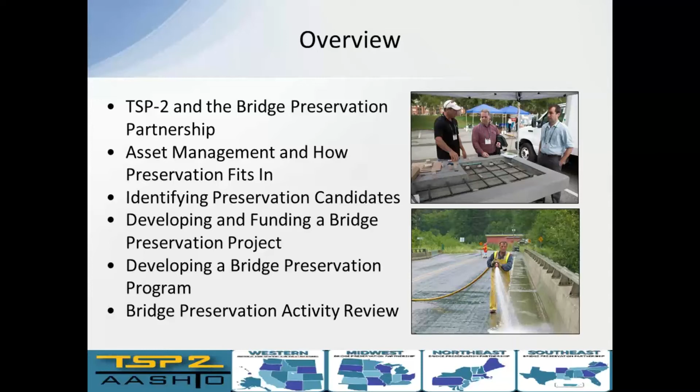Greg and I, we co-chair this working group for local agencies. The whole point of this working group was to really engage at the local level. So the TSP2 Bridge Preservation Partnership, it's composed of state owners like myself. You do have county and city engineers. You have lots of industry. You have lots of academia. FHWA participates in it. And so it's this great kind of collaboration that happens.

But we noticed that although we really had a strong support from our DOT members, we weren't really hitting the nail on the head for a lot of our local agency participants. And so this working group was formed specifically to try and engage more at the local level, encourage preservation and participation within the program. The partnership is really focused on preservation, how to extend the useful life of your bridges. I love how it is a collaboration of industry and owners.

There's not a lot of opportunities where you can show up to a meeting with, I always go to these meetings with a laundry list of my problems, specific ones, bridges that I'm not really sure what to do with, or even a statewide problem that we're trying to work on. And then I can sit down at a table with representatives from Alaska and Vermont and a whole wide range of different owners, and I can also have all the industry and all their competitors at the same table too. So you can really shop around to find that really strong solution and that collaboration approach.

Greg, who introduced himself earlier, he's a great example of this. The industry members through this partnership and the way it's set up, it can't just be a sales pitch. It's not just here, buy my product because it's better than X, Y, and Z. It has to be this collaborative effort to get you towards a good solution to your problem. And so having that set up is just something that I found to be tremendously valuable. I try really hard to maximize the partnership to reduce my effort at my own job. Yeah, so asset management plan.

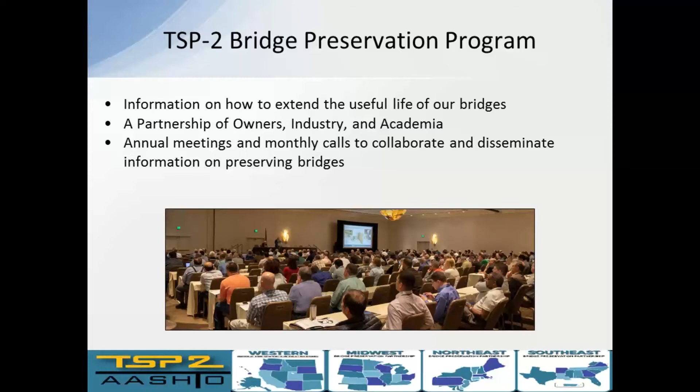I love this slide. It's exactly what I think of every time someone mentions to me their asset management plan. I have all these problems that I'm trying to narrow in on, and then they always reference back to, well, just have an asset management plan and you're good to go. So you got your forest, you got your trees, and then someone's asking, where's the forest again, right? Where do we really start on getting something that's tangible and useful to our inventories?

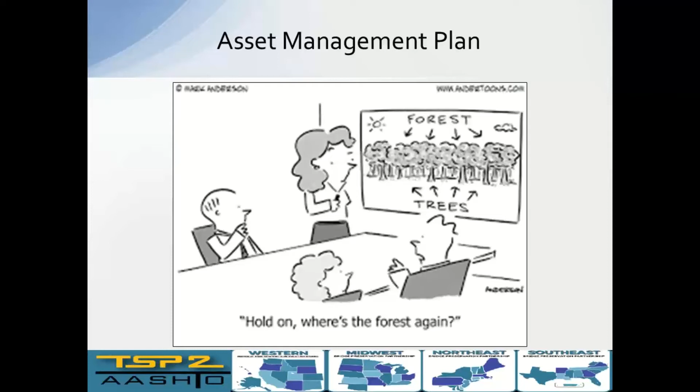This is the federal definition for an asset management plan: a strategic and systematic process of operating, maintaining and improving physical assets. You're going to focus on engineering and economic analysis, identify a structured sequence of maintenance, preservation, repair, rehabilitation, and replacement actions. The overall goal is to minimize your costs, right? So achieving a desired state of good repair. You got a bunch of good structures in your inventory at the minimum possible cost.

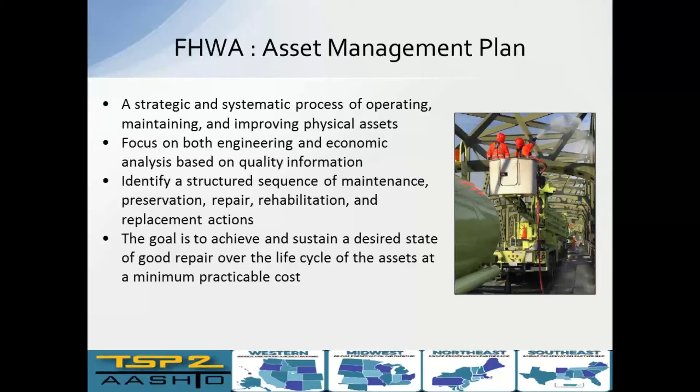This definition actually reminds me of the previous slide, where again, I read through it and it sounds pretty straightforward, but then again, where do you really start? What does it mean? I like this. This breaks it down for me a little bit better. Asset management plan. I can think of it as these three factors, right? I have replacements, which are at the bottom in red because we don't like them. Very expensive.

You get a brand new structure when you're done, but you can usually only fund a handful of replacements compared to your overall inventory, right? It's just very expensive to do. Oregon specifically has focused a lot on rehabilitation because we couldn't afford a lot of replacements. And so that's your kind of in-between tier there.

That's the significant investment in just keeping something in service. You usually get a big increase in the condition of the bridge or the asset that you're investing in, but it comes at a pretty significant cost and usually a significant traffic disruption. And then in green up there at the top, your preservation, your preventative maintenance.

Those are your actions that are kind of shown up there at the top with that bearing, right? That's just cleaning and painting. It's low cost, doesn't generally improve whatever's there. It just keeps whatever's there from getting worse. And so it's short-term, easy to do processes. Yeah, we'll kind of go into those a little bit more.

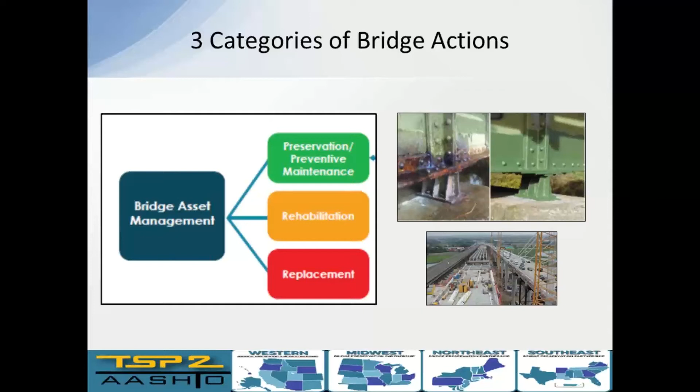So, just so people know, that particular slide came from the Federal Highway Bridge Preservation Guide, which is available online, and it could be a little overwhelming for trying to put an asset management plan together on a local level. But if you just want to take the time to peruse it, there's a lot of really good information within that guide.

Since it's published by the FHWA, it's a guide that's not only useful, but one that carries a lot of weight with it, right? If you go ahead and reference it to upper management, it's something that is a verified resource that you can kind of cite. You have your 3 legs of an asset management plan, right?

I kind of mentioned bridge replacements are in red. Those are the most expensive action. Generally on these, you're looking for your worst structure in your inventory. We see that this is a real focus, not just among states, but in particular local agencies, right? If you have a whole pile of bridges that need to be replaced and you only have funding to do a few of them, then all that funding gets dedicated towards this worst first approach.

The goal is actually to have the bridge in the worst condition, because then you get selected for replacement with those limited dollars. And so this is termed the worst first approach, right? You actually get a reward for having the worst bridge in inventory. The problem is there's too many of them, right? The cost to replace all these poor bridges is estimated at $26 billion. It exceeds the funding that is available.

Bridge replacements, although you end up with a nice shiny new bridge and get a ribbon cutting at the end, are also very disruptive, right? Replacing a bridge, even with detours, can be very disruptive to the traveling public. And it takes a long time.

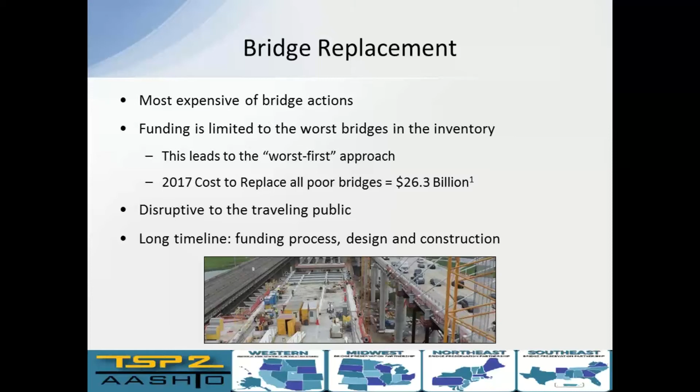Bridge rehabilitation, this is kind of our in-between activity. It's still probably a large-scale project. You're probably not going to do this with local agency forces. This is stuff that's going to be put into a large contract, hopefully with some federal funding. And a lot of times it's reserved for bridges that have one component with significant deterioration, but the rest of the structure is really worth saving.

So when you invest in a bridge rehabilitation, you're saying this bridge is really worth saving in the long run, because we're going to put this high initial upfront cost into keeping the structure in service. So the bridge is wide enough, it's serving traffic well, it's really worth keeping in your inventory. You'll do that large investment for rehabilitation. Again, these can end up impacting traffic quite a bit.

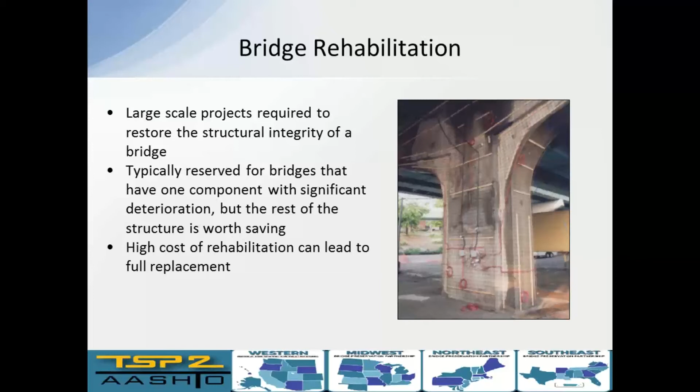Bridge preservation, what do we mean by that? These are basically just actions or strategies that prevent and delay deterioration. You're definitely not getting a new bridge. You're not getting a bridge that's been reworked to that rehabilitation level. The goal here is you keep your bridges that are in good or reasonably fair condition from getting worse.

It's not very exciting. It can at times be kind of a hard sell to upper management, because you don't see that big shift in condition ratings. Everyone wants to see that big shift with that large investment. But again, the funding's just not available.

So bridge preservation activities are ones that are very inexpensive, short-term traffic control, and they can significantly delay your good bridges from going into that poor group of bridges that need to be replaced. And we'll definitely get into much more of what that actually means.

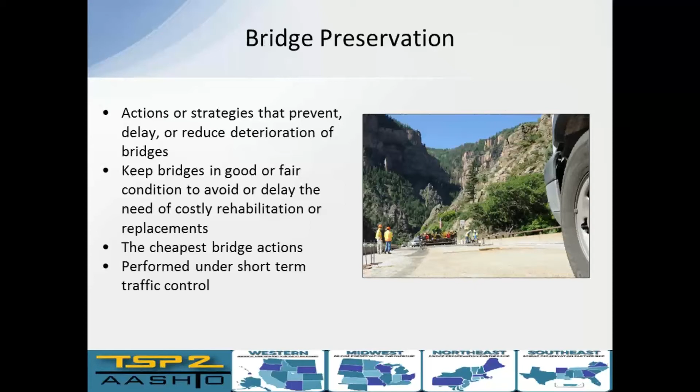Coming up with hammering home the point of what's the difference between rehabilitation and preservation, I love to look at bridge decks. One, they're really the only part of the bridge the public notices, right? If you get potholes or banging joints, you get phone calls with complaints about those. You have something going on in the substructure or the columns, unless it's something very drastic, the public just doesn't really see it. They don't really focus on it. So not only is it the one that the public sees, but it's also the one that's exposed to the most wear and tear. The roof of the bridge, so it's exposed to all of the de-icing chemicals, the rain and the snow, and traffic.

In Oregon, we allow studded tires, so we get a lot of wear and tear on our decks just from that. Highest value item. Also, if you want to do any work to the bridge deck, you have to take some traffic control into consideration, right? You have to take away a lane in order to fix it. So I call it the highest value component of the whole bridge. It's the piece that matters the most. And so we'll go through an example of rehabilitation versus preservation, specifically on the bridge deck.

I want to add to that photo real quick, because I was on this project. Can you back up one slide real quick, Travis? Yep.

It was supposed to be just a minor weekend patching project. And so they got out there with a chain to sound the areas of the deck to see what was becoming delaminated. And it was incredibly extensive, as you can see, a lot worse than they thought it was going to be. And the buses to take kids to school had to go over that bridge first thing Monday morning. So this was a perfect example of what happens when you really don't pay attention. It ended up being a much bigger project and much more costly. This was supposed to be a preservation project. It ended up being really a rehabilitation project because of the cost. The preservation was simply too late.

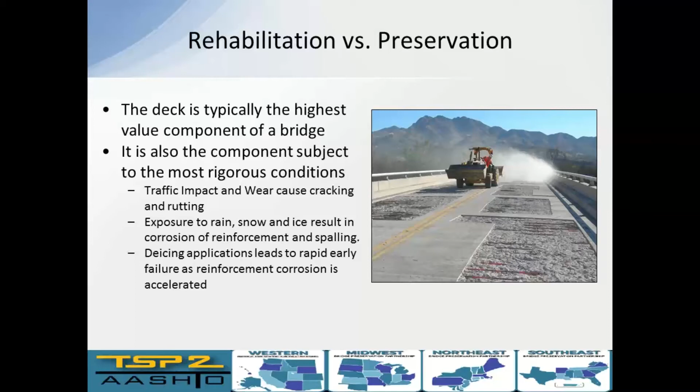Rehabilitation, what does it mean when we're talking about that? So this is an example. Once you get into rehabilitation for a bridge deck, you're removing concrete. You're getting in there, you're grinding away section. You're going to do a large patching or casting back, maybe a whole new cementitious overlay. It's a significant disruption and a lot of work.

When I look at costs for our work in Oregon, the thing that's most frustrating about these rehabilitation projects is that when you look at the bid items that are actually work being put into the bridge, it's a small percentage of the whole project. Most of the cost goes into staging. We'll spend 50 to 60% of the entire project cost just to get access to the deck to do the work. That's because, at least in Oregon, we're usually looking at a 7-day cure on our concrete overlays. So with prep and everything else, you're closing that bridge down for weeks, if not longer. So how you accommodate the traffic while you do that becomes a very big cost of the overall project.

The other thing is until you can get the funding in place to do that work, it's a huge drain on your maintenance resources, right? These are the decks where you're getting those big spalls coming off, resembling potholes, and you're getting rebar into car tires and tort claims. It's a continual patching effort just to keep the deck in service until that rehabilitation can come through. So it's that getting too far behind, like Greg mentioned. If you have that deck where you thought you could just continue on with it and it starts blowing apart on you and you end up with that much patching, it really forces your hand into doing some kind of action.

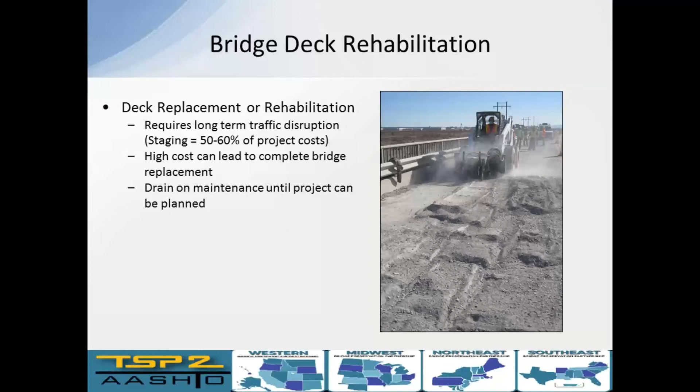The previous slide, we saw the grinder out there grinding off concrete. They're going to come back and pour new concrete. That's a rehabilitation. This is what preservation looks like. So this is an idea of a routine maintenance that you can do that would extend the life of a deck.

This is a bridge deck that's in good shape, and here they're flooding it with a deck sealer. So the idea is that they mix it. They've got squeegees out here. They're squeegeeing it into the cracks. It's going to fill those up. It's going to keep the water and the salts from getting down to the rebar and causing the deck to blow apart. You can see it's very short-term traffic control. They just have a couple cones sitting out there.

The hardest part I have with these projects and selling it to our maintenance crews is that no one's calling and complaining about this deck right now, right? The deck on the previous slide, they're getting calls and complaints saying, you need to get out here, you need to patch it, you need to fix this joint, you need to keep it so that I can drive over it safely and conveniently. This deck's not getting those same kind of public interest. No one's complaining about it yet.

And that's a key point because you have to really kind of think about, well, I can go and do this seal in a day with short-term traffic closure. And in Oregon, these are less than $2 a square foot. I can extend that bridge deck for another 5-10 years of service without having to get to those patching. But it's not an immediate problem in front of me. And so it's trying to think about how to change our thinking, to get ahead of that curve, preserve it so that it doesn't get so bad. You have to kind of do this work.

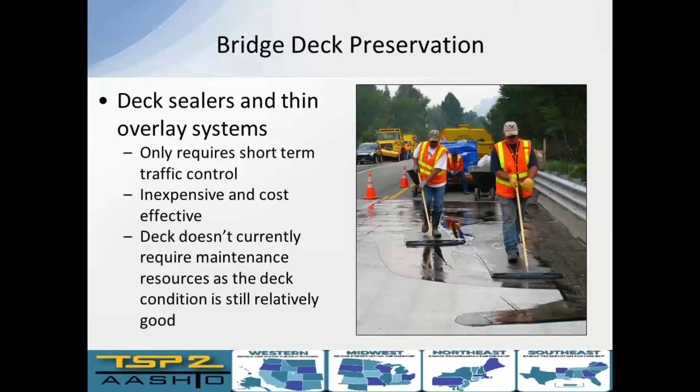And then it also helps highlight that it takes some time to see the benefit of the preservation. So part of that's educating the policymakers to say, look, this is a good idea and this is why. And sometimes you just have to wait to see how those preserved bridges perform so much better than the ones that you didn't preserve. The benefit of bridge preservation, like I just alluded to, it's easy to understand, but it's difficult to quantify. You preserve something and it doesn't actually change its current condition. It keeps it from getting worse faster.

So this becomes challenging when a lot of policymakers want to see that immediate bang for their buck, right? Even if it's a much smaller bang for the buck, they see that number increase, right? You go from a bridge that's in very poor condition to a new bridge that's in great condition, right? That gets people excited, even if it's a very little return on your investment. You're putting all your money into just that one.

And the effectiveness of preservation can really vary on what you're preserving and where it's at. So the climate makes a difference. Stuff in more extreme climates certainly benefits more from being preserved. If you're in a very benign climate, it's still a good idea to preserve those structures, but the cycle may be different, maybe further out. The structure type, current condition: if a bridge is already in relatively poor condition, it might be hard to get good, effective preservation treatments. I like to go to the extreme examples of this. An extreme example where 100% of agency funds is spent on preservation projects only, right?

So not a dime on replacement. At the end of all those fundings, there would be zero net improvement to bridge condition inventory. This is that struggle of trying to sell the benefit of preservation. It's easy to conceptualize, but it's really hard to sell at times.

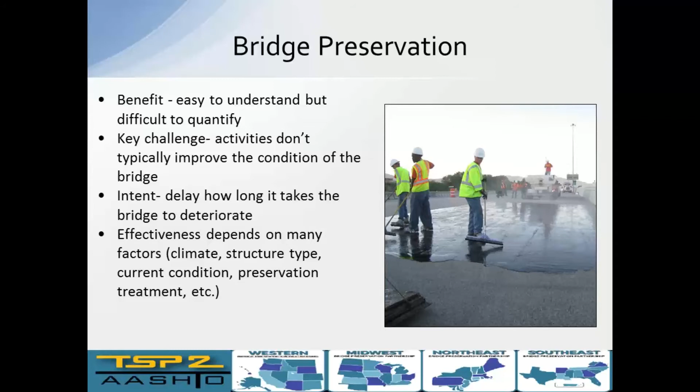One of the ways I like to try and communicate preservation versus rehabilitation is to use a car analogy. The life cycle and the maintenance requirements for cars aren't drastically different than that of bridges. So when I'm talking about preservation on bridges, I'm talking about washing bridges, maintaining joints, sealing, and we'll go through a whole lot of activities of different things you can do.

On a car, that's kind of like getting your oil changed, washing the car, rotating the tires, getting the transmission serviced. Kind of that idea that, well, I really should preserve my car, right? I should maintain it so that I don't end up having to do those engine rebuilds, the body work, tire replacement early, and transmission replacements.

Changing the oil in your car doesn't improve that immediate condition of your car, but we can all understand, even though most of us aren't mechanics, and I certainly am not one, that if I don't ever change the oil in my car, I'm going to get to that engine rebuild much faster. That's the same idea with your bridge deck. If you seal your bridge deck on a regular cycle, you'll avoid that deck rehabilitation.

It's interesting that it's a very easy concept to get through for car owners. Most of us don't change our oil on that really steady cycle, but we know that if we don't do it, there's a consequence on the back end. And so I use this car analogy a lot to kind of look at what happens if you don't take care of your bridges in a timely manner.

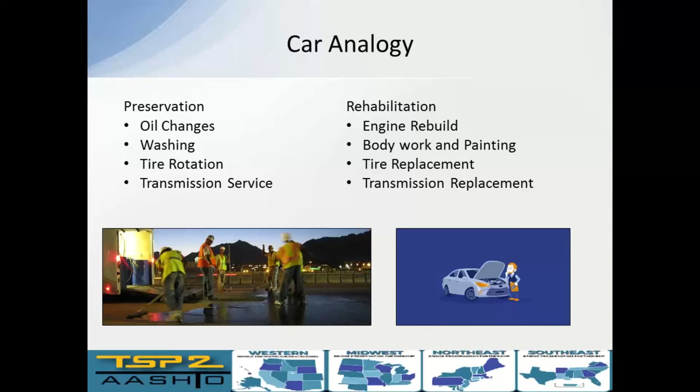We keep saying preservation, preservation, preservation. What is preservation? So these are just some common examples of things that we're talking about. These are your deck treatments, your sealers, and your thin overlays. Keep the water out of your deck. Even just washing the bridge to remove debris can really extend the life, especially around the beam ends and bearings. Cleaning out your joints, making sure that they're still watertight.

Some painting of steel structures. When you get into a full overcoat painting, that's probably more of a rehabilitation action because it's a much larger project, but even spot painting in isolated areas is definitely a good preservation maintenance level activity. Patching the concrete to keep the deck and other members serviceable, and then using waterproofing membranes when you pave on asphalt. Does the city of Lincoln, do you guys have asphalt on your bridge decks?

Travis, this is Zach Becker. I'm our bridge program manager for the city of Lincoln. We currently do not have any asphalt overlay. We're going to be applying our first two probably next year and the year after.

So it's very new to us. Oh, interesting. Okay. So in Oregon, we have kind of a half and half-ish mix. I'm actually not a huge fan of having asphalt over the top of our bridges, just because it seems like it needs to be replaced much more frequently than some of our other treatment options. When we do have asphalt, which we have quite a bit, we like to include some sort of a membrane to try and help keep the water off of the concrete deck. Something definitely to look at when you're going into adding those overlays.

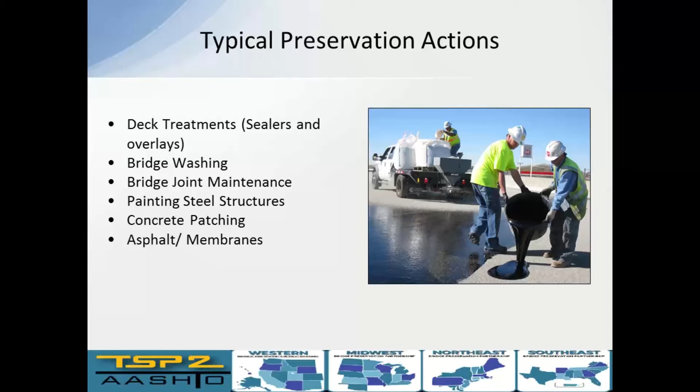Does the city of Lincoln have maintenance crews to do any maintenance activities? We are definitely more of a reactive maintenance than a proactive at this point. Our asset management program, we've been working with our street maintenance group, but we're really just trying to get better at that. And it's sort of still a new thing to us, but we do have maintenance crews.

One thing I was going to add, and Travis, I don't know if we have any reference to this, but the Federal Highway folks, and we were involved with this process, created some pocket guides that are now phone apps for some of these preservation actions, and they're available in kind of a checklist format. So if you have maintenance crews and you want to perform some bridge washing or patching or deck sealing or something like that, your maintenance crews can pull the app up on their phone and go through the checklist, make sure they have all the right tools and equipment and the surface preparation, and it's really very detailed, point to point, step by step method.

So anybody in any kind of maintenance crew that performs activities at all can easily follow and perform these actions with this phone app. And we definitely do have references to those at the end of the presentation, Greg, and then we'll make the presentation available as well, so you guys can have those resources for sure.

Once you look at why do preservation, if we get past that first hurdle, we want to maintain the bridges. Now it's starting to look at what bridges should we be looking at maintaining. So there's a few different categories. There's going to be these high value bridges. This is the historic McCullough Bridge in Coos Bay, Oregon. It's a beautiful bridge. It's 5,400 feet in length. It was constructed in 1936.

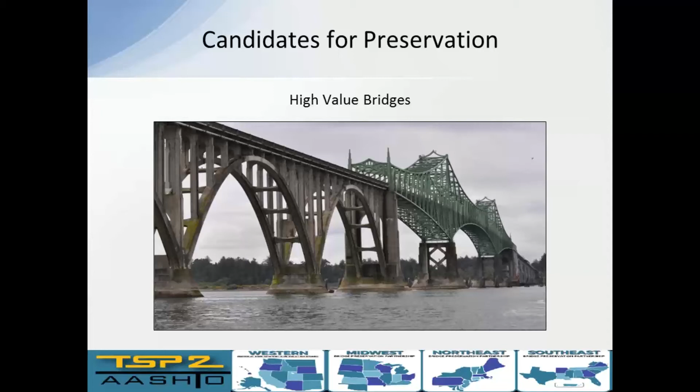These aren't the ones, though, that we're really trying to weed out, right? These are the ones that kind of stand out to everybody. General public gets the message. These are the ones that are easy to preserve. The ones that we really want to focus on, from my perspective of just maintaining the overall inventory, are the ones that are in relatively good condition. And so it doesn't have to be that beautiful, massive, historic bridge that makes it worth preserving. It just needs to be a bridge that's serving its purpose and hasn't fallen into a state of disrepair yet.

Once your bridge really starts deteriorating on you, it kind of doesn't matter a lot what's the method or the mechanism for deterioration. It's going to progress rapidly, right? It starts to kind of grow exponentially as your bridge condition continues to drop and you get towards that bridge replacement. Once you have a bridge that's in very poor and severe condition, it really is not going to help you a lot to go and throw a sealer on it or to wash it, because at that point your bridge is probably lost and it really needs either a massive rehabilitation or more likely a replacement. So it's really trying to focus in on those better bridges and keep them in service for longer. You already have a lot of data at your fingertips for this.

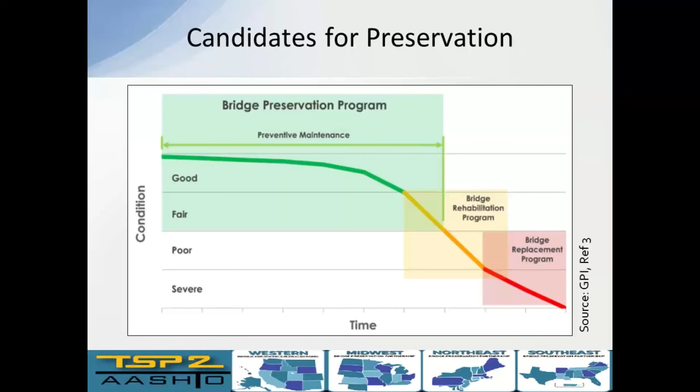The National Bridge Inspection data will help get along that path for looking for those good bridges. I would caution against focusing just on the NBI data, which was what was shown in this previous chart, right? Good, fair, poor, those are NBI deck, super, sub ratings. Get down into the element level data. That's where you can really go into the bridge components and look at your cracking in your deck elements, your leaking joint condition states, and start to really train in on very specific projects that can be addressing

those defects. In Oregon, we're having defects that are assigned to all of our element level data. And so the inspectors will put on their spall, that cracking, and I'll just go and search the database for those defects, or hopefully the maintenance recommendations, and start pulling those out as we prioritize our work for the year.

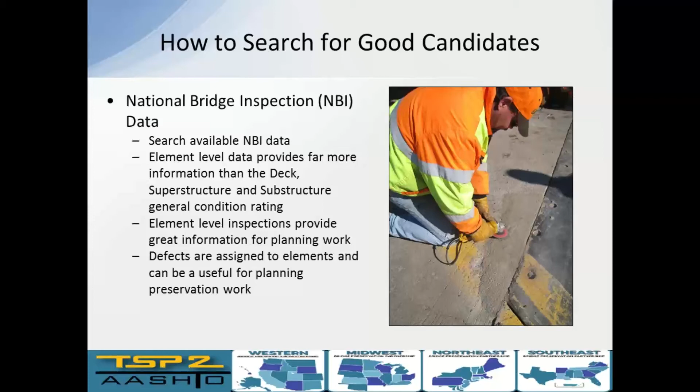Developing a bridge preservation project. One of the first things to look at is, is this stuff that can be completed in-house with those maintenance forces that you have, or do you need to put it into a contract? There are a lot of products and applications that can be done without a great level of skill set or a lot of equipment costs, right? There's a lot of stuff here where it's a 5-gallon bucket or a big trash can and a mixer and squeegees, right? Stuff that you can pick up at a local Home Depot.

There's other stuff that's going to need higher, more technical expertise, and that would be more suited for contract. Regardless, if you're going to contract work, I would strongly suggest looking for the ability to bundle it, right? Preservation projects are usually of that smaller scale. Using decks as the example, to go seal a deck in Oregon, a typical deck, 5,000 square feet, that's probably in the ballpark of $10,000 to complete with our crew forces. Not a huge cost for that one deck.

If I put that out into a contract, I would probably get some bids on it, but it wouldn't be for $10,000. It would be for a much higher rate, because it'd have to make it worth that contractor's time to actually go through the process of doing that. You also pay a little more overhead in contracting work, because you have to go through all the plans and specifications, instead of just handing one of the maintenance crews that pocket guide or some other reference material to just go and do the work. So do think about that if you decide to contract it, to bundle it.

I would encourage, especially since you guys are talking about that beginning phase of maintenance of this bridge work, to do some work in-house. I watched a great presentation at the Pacific Northwest Bridge Maintenance Conference, where there was a local agency. He had no crew members at all. He really wanted to install an epoxy overlay on one of their bridge decks. He was adamant that it was a good bridge deck to save. He had concerns with the amount of salts that were being applied to it and wanted to extend it.

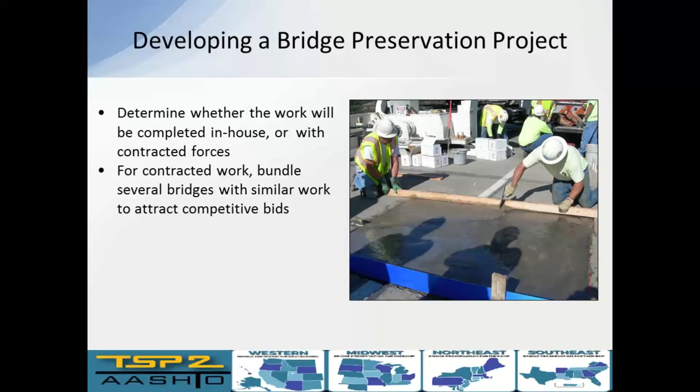So we always invite the rep out and just ask if you're going to be around and you're available, please come and give us a demonstration. And then we'll actually invite other crews over to come and watch it as well. Even though they may not be installing it then, it may be something for them to look at in the future. Definitely some great contacts through the TSP2 partnership for doing that.

Funding bridge preservation. It can convince you that it's worthwhile to do and kind of help show where the projects are, but if the funding's not available, then we don't get very far. The federal funding has actually stepped up behind this. With the Moving Ahead for Progress in the 21st Century Act, MAP-21, and the Fixing America's Surface Transportation FAST Act, the government recognized the benefits of bridge preservation and made it all eligible for federal funding. There is federal funding that could be available for this.

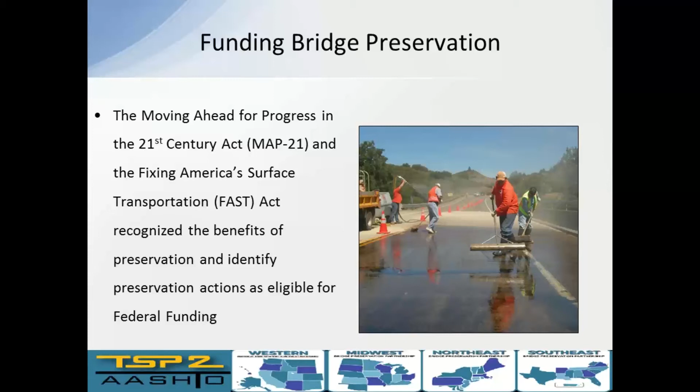So some of the actions that are specifically called out are things like bridge washing, cleaning drains, joint cleaning, sealing concrete. These are cyclical activities, so these are ones that you aren't necessarily reactionary, but it would be something you try and put onto a schedule. Every year I'm going to clean this bridge deck, and every 5 years I'm going to seal the concrete, some kind of a cycle. I will admit, even in Oregon, we totally bought into the preservation and the cyclical activities and the benefit they could bring.

We are still very reactionary in Oregon as well. Right, so it's something to strive for, something to consider trying to set up, but I totally understand the constraints that Lincoln City is under and us as well, where it's just hard to get out of that reactionary mode. Getting a cyclical maintenance is definitely one way to do it. The list goes on, it gets much longer. So these are more condition based.

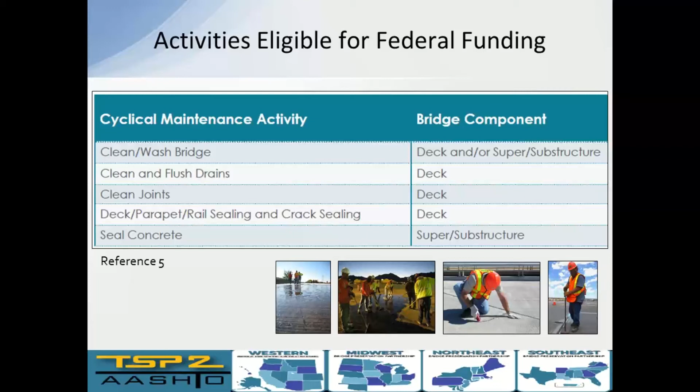So these are where you actually have a defect and you're correcting that defect through some level of preservation. So you're repairing the drain that's broken, you're overlaying a deck with asphalt. If you include the waterproofing membrane, then it counts as a preservation activity. Thin polymer epoxy overlays, those are something that Oregon has really embraced and we've really got a lot of mileage out of. I'll show an example of what those are, but it's basically just about 3/8 of an inch thick. It has aggregate mixed in with epoxy on the bridge deck, and it actually gives you a whole new wearing surface and prevents water and salt from getting into it.

Out of curiosity, are you guys aware of any of the thin polymer epoxy overlays on bridge decks in the Lincoln inventory? We have done some silica fume stuff in the past, no thin overlays to date. The state has done some in our area, so we are aware of them, but still we haven't gotten to it yet. I'm working on it right now.

The silica fume overlays, we definitely have a lot of those in Oregon. Those are what we would call a rigid overlay. They definitely have a purpose. I usually put them more as rehabilitation than just preservation, although I guess they can be in both categories. The one thing I like about the thin polymer epoxy overlays is that we're installing those at around $4 a square foot, where those silica fume overlays are much, much more. And we're seeing some really good results out of them. So a good low cost, low tech process.

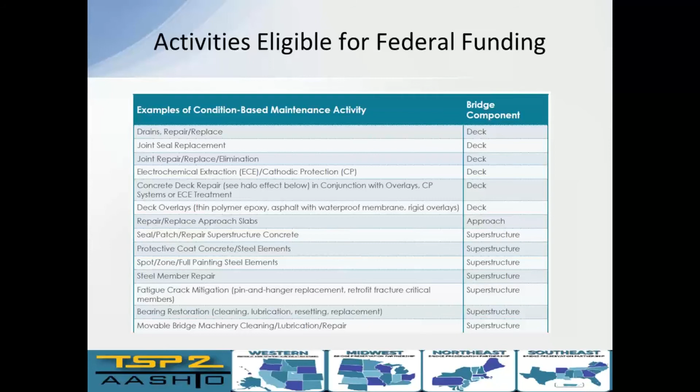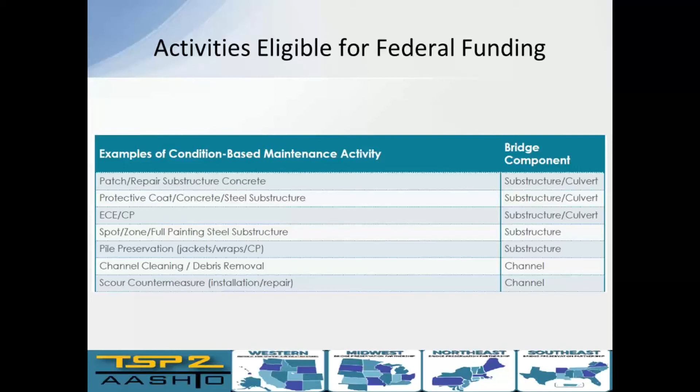And again, I'll go over a bunch of these different actions later in the presentation. I just wanted to give an idea of how big the list is, and it continues on, right? There's more and more that all qualify as preservation. These qualify for federal funding. When we were developing this presentation, we said, well, this all qualifies, this is what's going on. And then we said, okay, let's go ahead and grab a handful of our local agencies that have been active with us, and we'll use them as examples for just how great that funding is for doing this preservation work.

And a lot of what we're seeing is that the big federal and state funds that the locals compete for really get locked into that worst first approach for an awful lot of what's happening. We're trying to work with agencies that have already got their hands on that fund to use as examples, and also trying to look into ways that our group, in cooperation with that expert task group, can start to look at changing the system a little bit to make those funds more readily available and easier to use

for preservation activities. I will say that the bulk of the preservation activities, the real success stories that we have seen, are the locals generating their own revenue to do these lower cost activities. And so we hope to include a lot more on this in the future. Definitely ways to get your hands on state funds for preservation and hopefully federal funds. But right now, the best examples we have are those that have bought into the process at the local level and generated their own revenue to do these low cost activities.

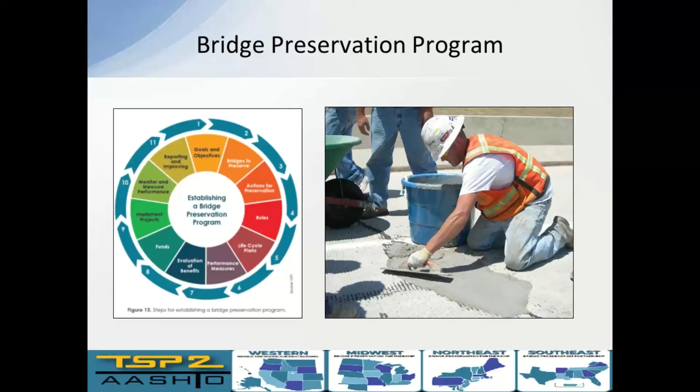Bridge preservation program, we've got a wheel here that covers 11 different steps. This is from the FHWA bridge preservation guide. We've already discussed quite a few of these steps, right? We've gone through identifying preservation actions. We've looked at selecting projects, evaluation of benefits, and looking at the funds. It's a lot of steps here. We won't go through all of them during this overview, but wanted to at least show that there are some nice graphical breakdowns to show how this can be done.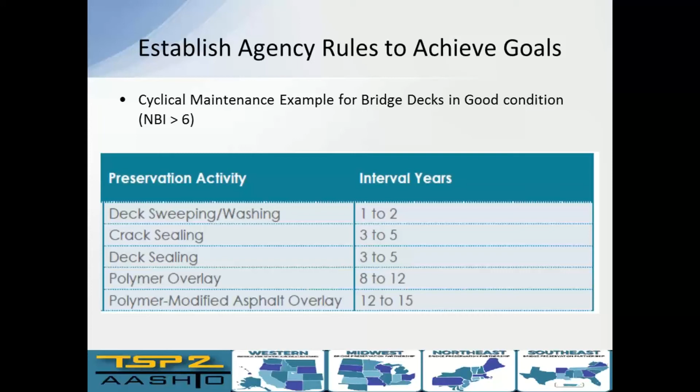So measuring the benefits, there's been tons of work taking place on how you show the benefit of preservation.

We've already come out and said straight up, it is difficult. It's hard to show that change in condition because a lot of preservation actions don't jump the condition significantly. A lot of times it just delays the rate of deterioration. However, some stuff does. So say the thin polymer overlays, those are actually an overlay that goes over the bridge deck, still a low cost preservation treatment.

You can show that it actually increases the bridge's condition and then show on a chart how it actually increases the service life. So this is all based on predictive deterioration models. There is a lot of research that's out there already on this, and actually a lot taking place now to truly show in a deterioration model the benefits of preservation for different activities. But again, you'll see here that the action was taken while the structure was still in a relatively good condition. So you get that jump back up and delay that drop off of the curve.

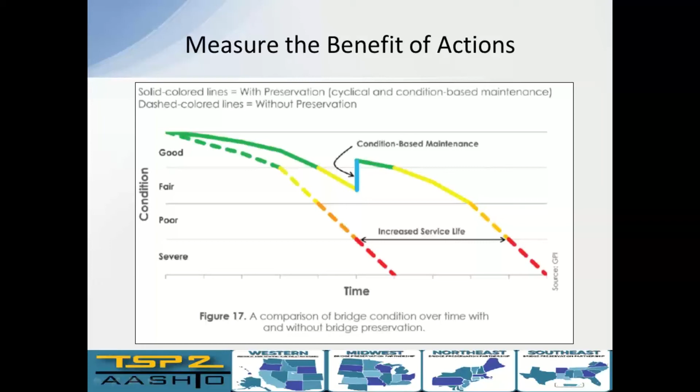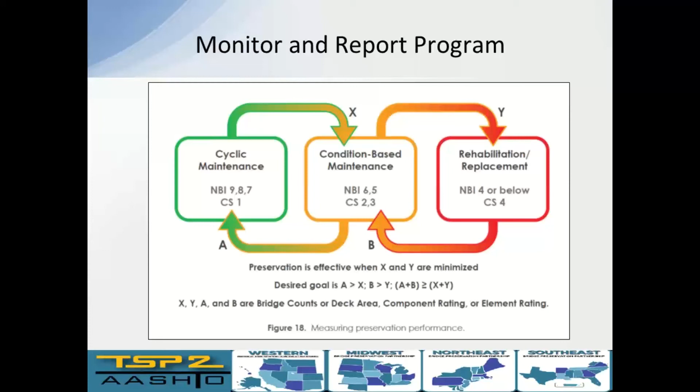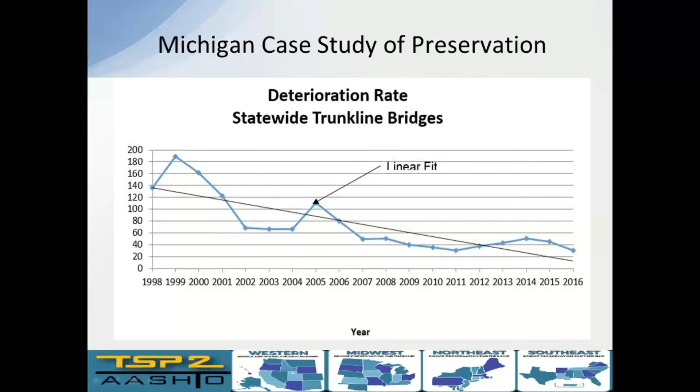So now we'd like to run through a whole slew of different preservation treatments. This is just meant to give you an idea of the different activities that are available, and an idea of just how hard or easy they are to accomplish. We'll also go to the additional resources that show a whole lot of different information on how to go way in depth on this. So this is just a brief overview to kind of give an idea.

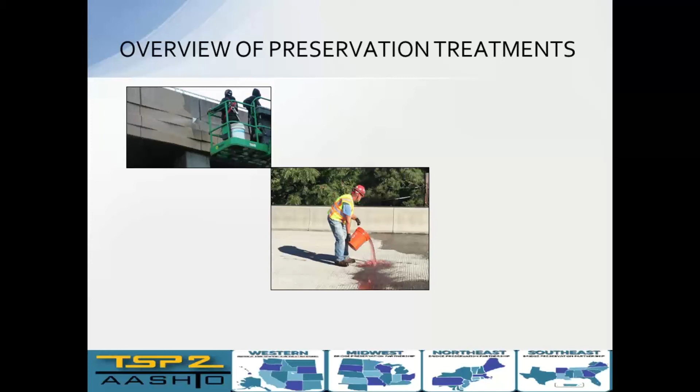So we'll kind of start with the easiest stuff, right? Cleaning and washing. That's really pretty self-explanatory, but can provide some tremendous benefit to the bridge at a very low cost. Washington State has done a lot of research on this. In particular, they did some work that really helped from an environmental standpoint, especially when you're working below the deck and you're washing off the bridge. Well, that debris will fall down into the water below.

There were some pretty tight environmental regulations, in particular in Washington and Oregon too. We piggybacked off their research. They said, hey, look, you've got to contain all this water. That's a huge effort, right? That takes it from just using the fire hose and cleaning it off to full containment, having baker tanks and filtration, and just this huge deal.

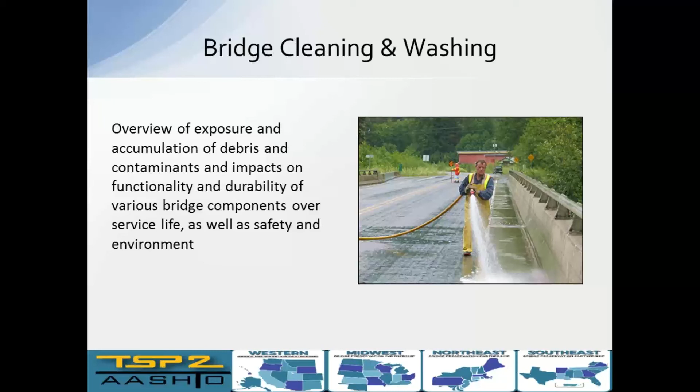They went ahead and showed that if you measure upstream and you measure downstream and you clean at a reasonable cycle and you do it at the right time of the year, you can't measure the amount of contaminants that were put into the water. And that was something that was presented through this TSP2 partnership that Oregon piggybacked on pretty quick to actually get that benefit from. Some of the things that you need to think about when you're getting ready to do the cleaning is the accumulation of contaminants.

I just mentioned if you're on a good frequency, you're probably not going to be able to actually test that level of contaminants that go into the water. If you only clean once every 50 years, well, that may not hold true either. And so just some of the things to think about as you go and start to set up a cleaning and washing program. But I would highly recommend referencing some of that research that was done out of Washington State.

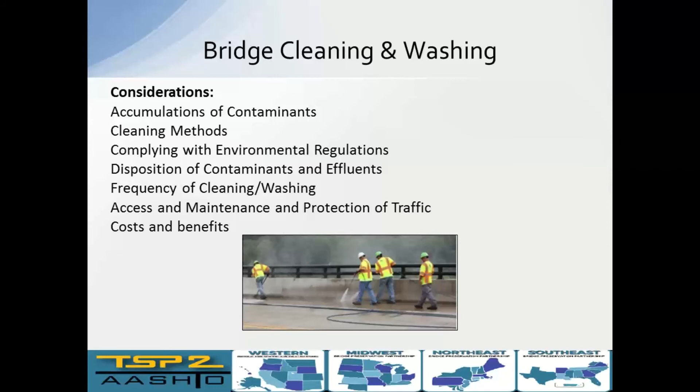Certainly methods of access is going to be something to look at if you're on an overpass, but certainly the bridge decks, you can block off your drains and clean the bridge deck with very limited environmental exposure. Some steps to do before you clean: sweep the bridge deck, right? Get rid of as much of the debris as you can while it's dry. Same thing with around your bearings and your joints.

If you get a lot of that debris out before you start hitting it with the water, you can kind of get down into that level of this is not going to be washing off a lot of contaminants. Pressure washing expansion joints is really important to keep them clean, because the debris will kind of impact the joints and it'll lead to them failing much quicker than if they were cleaned out. It's a lot more work to replace a joint gland than it is to flush it out.

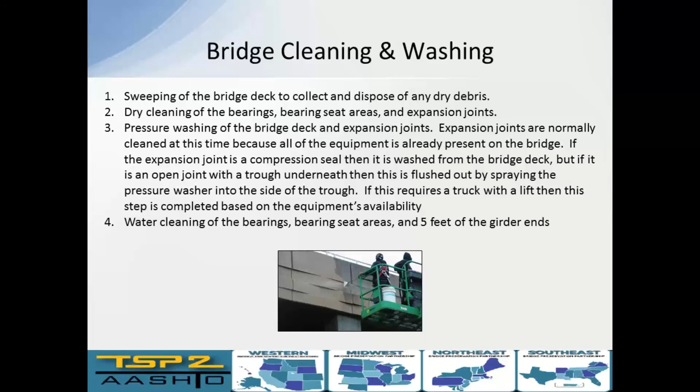Certainly the whole structure could benefit from being cleaned, but really, if you focus in on the deck and then underneath your joints where you have your bearings, your beam seats, and then the beam ends will give you your most bang for your buck. So this is a very low technical, low cost activity. It can be accomplished with any number of in-house forces. I actually heard of us working with a local fire department to clean some of our trusses where they just kind of worked on using their fire hose. Cleaning the deck's important.

Sealing. So these are penetrating sealers. Again, it's a very low cost, easy to apply activity. This one here is a penetrating sealer. It goes down with like a spray bar, as you can see in the photo here on the right. A lot of times these are a silane type of product that actually seeps into the concrete and makes it bead up water. So it doesn't necessarily fill in the cracks, but it does make concrete repel the water as it hits.

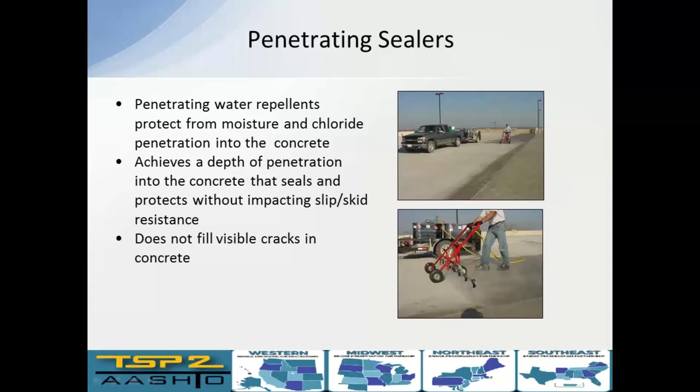And of course, if you keep the water out, you're keeping a lot of the contaminants and chemicals out as well. It doesn't impact your skid resistance or your slip resistance with tires on it. And again, very low cost, very easy to do. There's other types of sealers as well. There's flood sealers where you're flooding the deck, and in these ones, you're trying to actually get in and fill in the cracks.

A lot of times these aren't actually being absorbed so much into the concrete as they are a crack filler. Definitely useful for keeping those salts and water from getting down to the rebar level, where you really don't want it, because that's what will start causing your decks to kind of break up and start cracking away on you. Sealing, we're kind of looking at, if you use a rule of thumb, maybe a 5 to 7 year frequency. And again, you're looking at a pretty low cost investment.

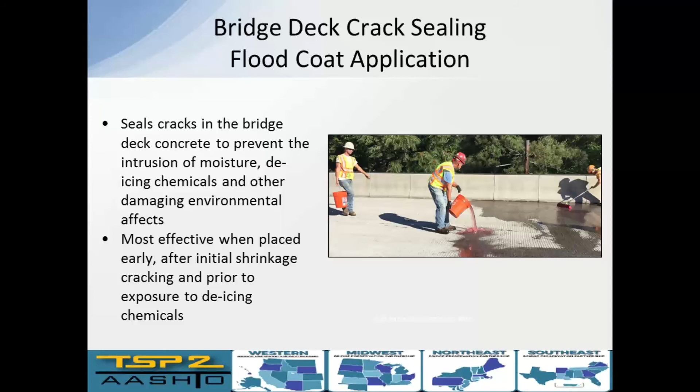Thin polymer overlay systems. This is what I mentioned. We've been using lots of these in Oregon. We install them with the in-house forces and we contract them as well. These ones actually create a barrier on the deck. So it doesn't just slow the rate of water and salts from getting down into the rebar. It actually makes that barrier. As long as the barrier is maintained, it gives you almost a complete protection.

And a benefit to these is the traveling public likes them because it looks like you have a new overlay, right? You do have a new overlay, but a new wearing surface. We've noticed that the skid resistance on these go through the roof, at least initially. They probably wear back down as they polish up a little bit towards that original concrete deck, or maybe a little bit better than it. Choosing a good aggregate for the broadcasting can definitely make a difference. I think I have some installation photos of it.

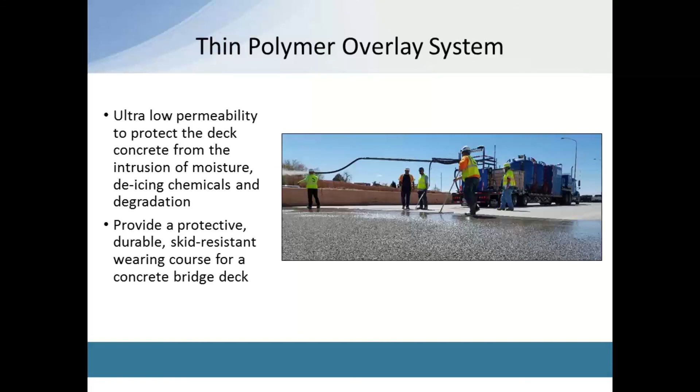So these are typically an installation where you start off, it looks similar to a deck seal that we talked about, where you have a squeegee there and you have the epoxy going down over it, but then they broadcast aggregate into that epoxy while it's still soft before it is actually tacked over and set. And that aggregate is what forms that skid resistance, that wear resistance, that lets these things last for a long time. Again, the costs on these are relatively low.

I know in Oregon, we're kind of in that $4 a square foot range for these type of overlay systems. So maybe double your cost of a deck seal, just sealing up the cracks, but with this you actually get a new wearing surface that is intended to last for quite some time.

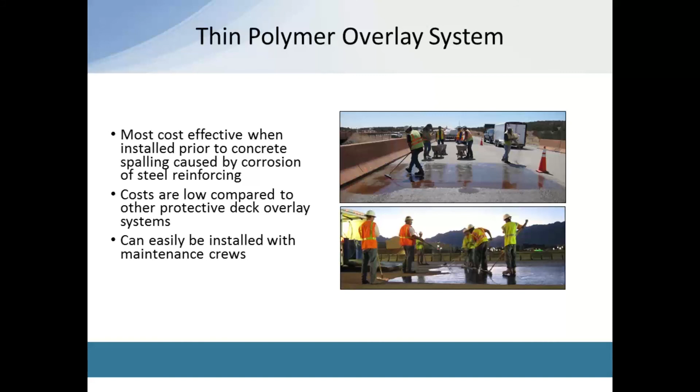This photo just shows on the left-hand side, they've installed the overlay. So you have that nice new looking wearing surface. On the right, they're still getting ready to do the overlay. This is short-term traffic control. You install, the second lift just as done on the first lift. So you do 2 different lifts to get you to that 3/8 inch of thickness.

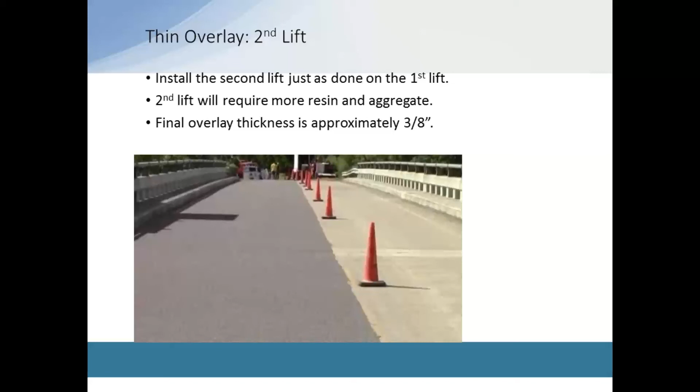This is a reference to the pocket guide that Greg had mentioned. And Greg, maybe you want to jump in and run through this slide here. A lot of content on various slides called the pocket guides. The pocket guides are published in PDF form on the TSP2 website. I don't know if we have time to show that right now, but I think there's a slide later in the presentation that shows how to access the PDF form of these pocket guides. They're free. They went through a lot of oversight and review before they were published.

They're very intensive. They're in a checklist format, which makes it really easy if you're a crew, or even if you're developing a specification and you want your inspectors to understand what's taking place. When the contractors come out, the inspectors have a checklist. Even if they're not familiar with the process, they can work through with the contractor to make sure that they're following the best practices. So these pocket guides are really an excellent tool. They're free. They're available in a phone app as well.

One thing I'll add, in my history involved with these various preservation activities as a material supplier, what typically is the cause of failure has to do with miscommunication between the development of the specification, the bid documents, the contractor not understanding best practices. And so these pocket guides really fill in all the blanks with that. And the other thing is if you have a maintenance crew, it gives them an opportunity to review the best practices. So it's really a great tool.

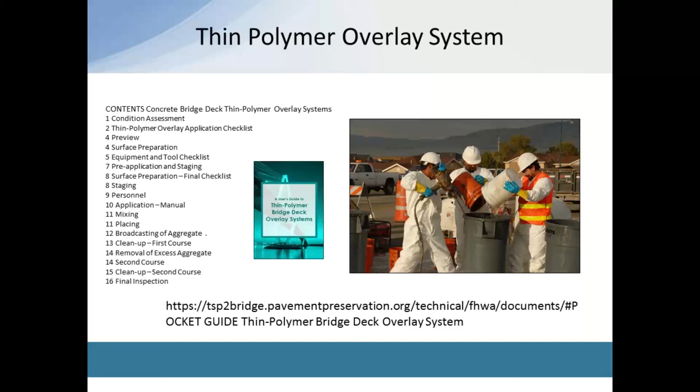Sealing asphalt, at least in Oregon, we have 3 different types of membrane systems that we use with asphalt. There's the spray applied membranes, which is a polyurea. Typically, there's a polymer membrane, which is very similar to the thin overlay that we just showed. We just install it before the asphalt. And then there's the rolled membrane solution, which is a fabric type of a membrane.

I think I'm going to just run through some ideas of what the rolled membrane installation is. So I'll back up real quick. The spray applied membranes, those are typically going to be done under contract. They do require some specialized equipment. It would be possible for crews to install these on their own. However, certainly in Oregon, we do not, and I'm not familiar with other states doing them.

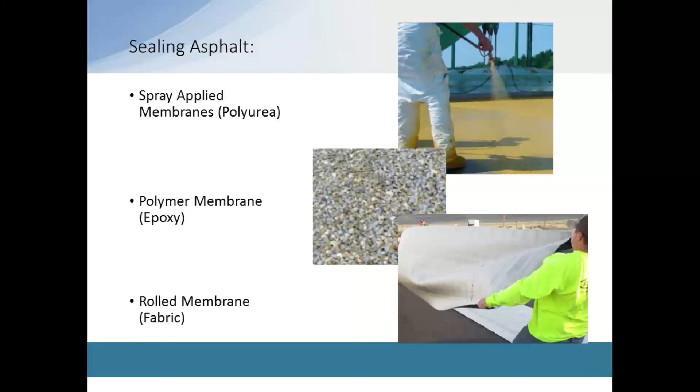I would call them maybe more of a Cadillac of the membrane systems. They do seem to perform quite well. However, they come with a pretty significant cost compared to the other 2 options. So since we're trying to encourage installation at the in-house level, I'm going to run through the rolled membrane solutions because these are the easiest ones to put down.

And so here's an example of a crew. This is one of the Oregon crews installing a rolled on membrane. Really is just like it sounds. It's a fabric that goes down. You roll it out. You can see this one has an adhesive backing on it. And so the person in green is pulling that backing off. So they're going to go ahead and adhere it down to the deck.

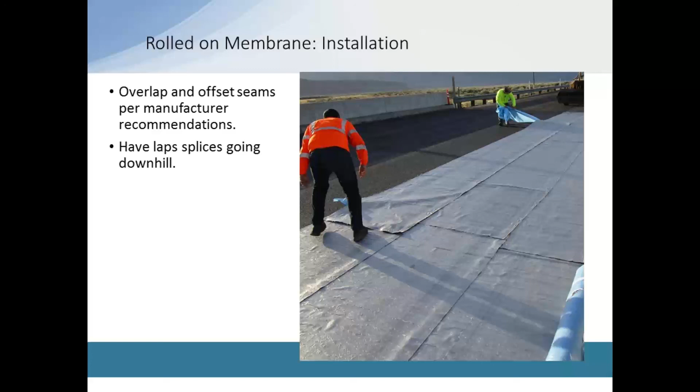They overlap their splices. It's really a straightforward thought of trying to basically put a rubberized kind of material into the asphalt so that you keep the water from getting down to the deck. And here they are, they're paving over the top of it. Low cost, we're in that $2-3 a square foot range. Of course, it varies depending on the product selected, but relatively low cost and definitely relatively low skill level to get installed.

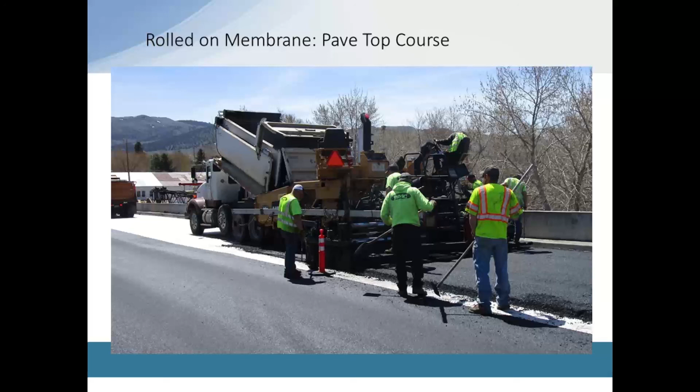Joints have a whole wide range of different kinds of repairs. A lot of times they end up with replacements. They get broken up. Joints are one of those things in the preservation community that get picked on a little bit, right? Everyone can point to joints that have failed, some prematurely. They tend to be very sensitive to being installed correctly. A lot of these joints are being glued or adhered into place. And so anytime you do something like that, you know it's not a mechanical interlock. It actually needs to be prepped correctly and done well.

The whole purpose of a bridge joint is to allow the bridge to move, right? It moves under thermal cycles as the bridge expands when it gets hot and shrinks when it gets cold. If you don't allow for that movement, then you can cause some really significant damage. I've seen where the bearings and the anchors have been dragged as the bridge bound up and pushed itself. And we started having concrete falling off the supports where those anchors were embedded, because the forces are so tremendous that they're just going to move, and whatever's in their way will get broke.

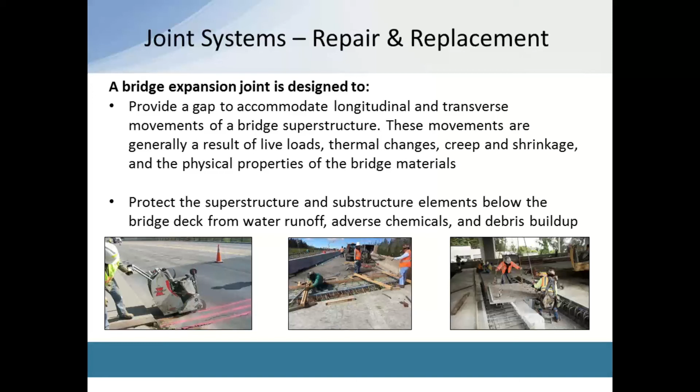Aside from being impacted and causing that damage, if your joint just leaks, then you get all the debris and the other stuff that you've been trying to seal the deck against getting down. Now it gets down through the joint and onto everything that's down below, and can cause some serious problems down the road. Fortunately, bridge joints can be pretty effectively maintained.

You can go through and clean them. The photo on the left is a crew installing a new gland into a joint with armored corners. You can see there's a finger joint on the right, where you actually have the steel fingers that kind of overlap and go into here. Those joints typically don't have glands with them, so they're considered an open type joint. But still maintaining them can help with plows and any other damage you'd get.

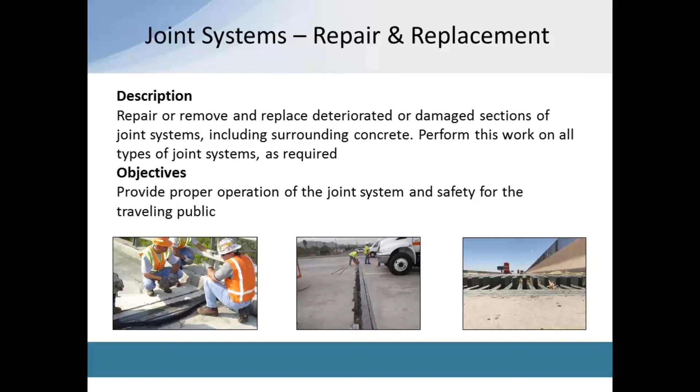And then you can see in the photo in the middle, they're saw cutting out a bunch of material and going to be putting in some new headers to improve the ride across. There are pocket guides for these. As Greg had mentioned, pocket guides for the overlays. There are also ones for cleaning or washing bridges. And then this is for the expansion joints. It's really helpful to educate and get a good installation.

Like I said, these are very sensitive to being done well. They are conducive to in-house forces. You can definitely do them with crews, but you at least need buy-in with the fact that skipping a few of the preparation steps can result in the joint failing almost immediately. So it's one you just don't want to skip on, but it's not particularly complicated to do it well.

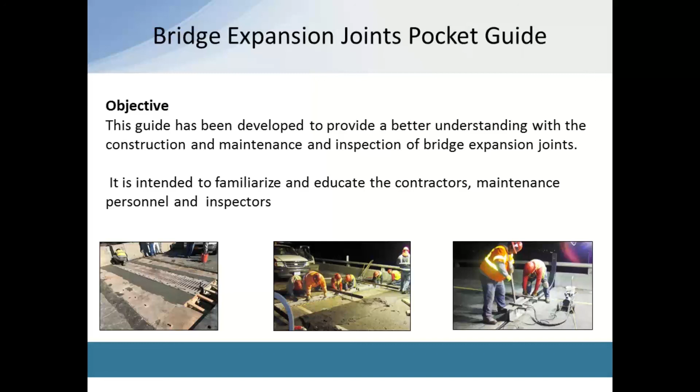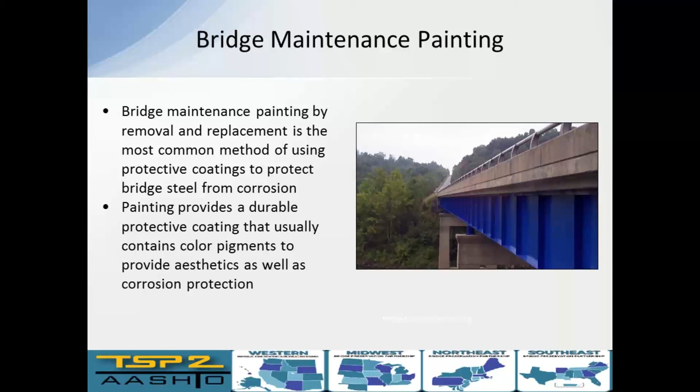Painting's another type of activity that's pretty common. This is showing an example of a full overcoat, so maybe not the best example, but where you have steel beams with some paint failing on the end, doing a good removal and cleanup and then just touch painting the end can extend the life of the whole overcoating. And here's some examples.

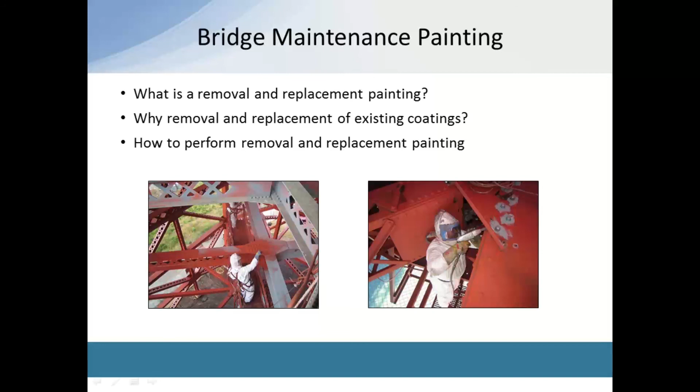You want to do maintenance painting before your overcoat gets in very poor condition, right? You've got to get to it before it's failing all over the place. So spot painting can be very effective when it's not in particularly bad condition, with good surface prep, similar to the joint work. If you don't do any prep and just slap a coat of paint over some rusting crevices, it'll rust right through the paint and won't stop.

It can definitely be done with local agency personnel, in-house forces. Good specification and training is vital on this one, because if you don't do it well, it'll fail quickly. Of course, a lot of our bridges have lead paint, so making sure that you're in compliance with environmental and OSHA measures to keep workers safe is a key part.

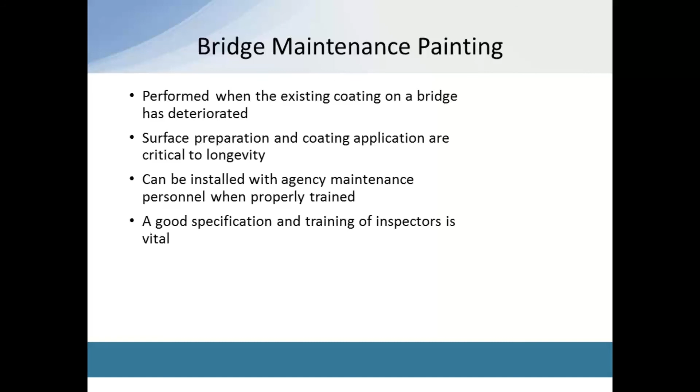But patching is done for a variety of reasons. Corrosion of the rebar is probably the #1 cause for big delaminations. You get water and salts down to the rebar level, and it starts to form rust. When the rust expands, it expands significantly, and it'll pop out the concrete. You can also have freeze-thaw cycles cause problems with concrete. Load stresses, so you have big overloads. We have problems with our new overlays and new decks having a lot of shrinkage cracking right after they're poured.

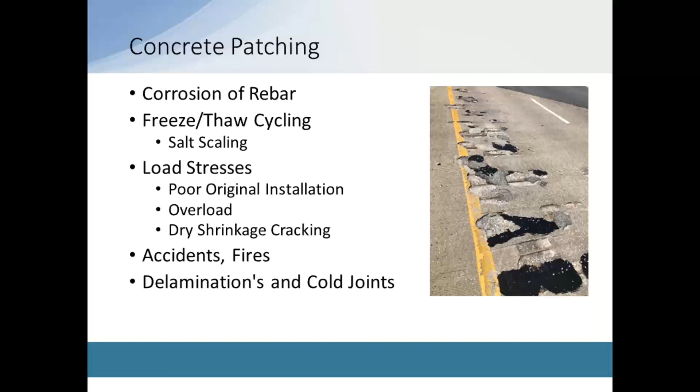I've also had problems with fires. A tanker truck catching on fire, or even just a standard truck that gets its diesel lit from the tanks, can certainly cause significant damage. Patching materials are placed to restore the concrete cover. So you want to chip out and saw cut around the edges, and get good prep.

The things that you just kind of want to look at is, what are the conditions of this deck and why are you there to patch it? So some of those initial considerations will kind of influence how you do your repair. Again, though, this is going to be something that's easily tackled with a crew.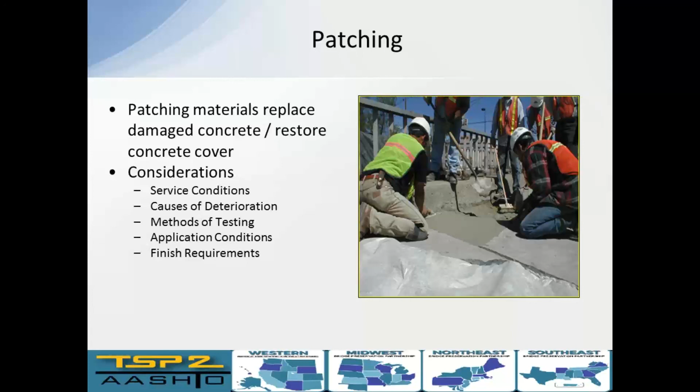Site preparation considerations: obviously traffic control is a big one for anything that you're doing. It'll definitely make an impact on how quickly you need that repair material to set up. Some materials can set up very, very quickly and some take longer, so something to think about. You need to make sure you have your tools and power sources available.

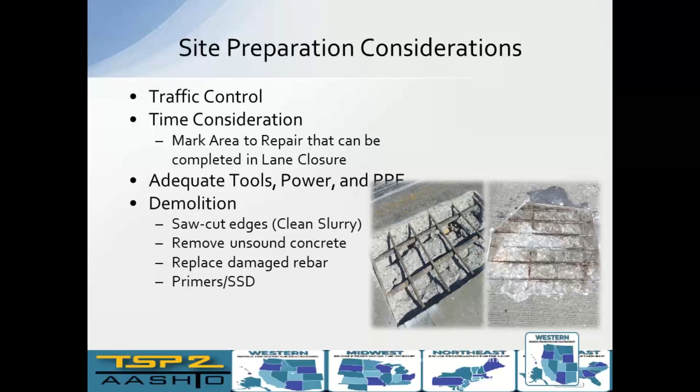Clean your rebar. There's little zinc anodes, which I don't see in this photo, but they're basically like a little hockey puck that has zinc on it that you tie on with a tie wire, and it'll actually slow down the rate of corrosion. So the anode takes the corrosion instead of the rebar, and it'll keep it from spalling out again in the future, especially if you have a lot of salts in your deck. I know that was a lot. Quick overview of those different preservation techniques.

Now I'd like to go through additional resources, where you can get a lot more information. There's the FHWA Bridge Preservation Expert Task Group. You'd already mentioned one of the efforts from that task group is to look into the funding barriers for local agencies. There's lots of other initiatives from that task group: the Bridge Preservation Guide, pocket guides, newsletters. A lot of these are published on the TSP2 Bridge website. It's definitely one that I'm going to highlight here. I can pull that website up in a minute.

I look at them as being good. I'm an office person, so they're useful information for me to make sure I understand how the process goes. They're much more useful to those that are actually in the field that need to do this work.

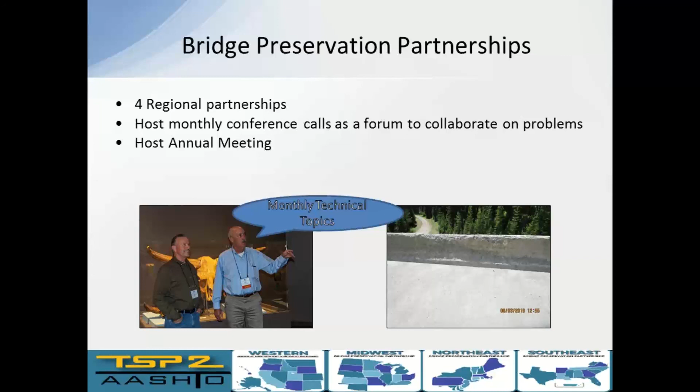I use it quite frequently to kind of bail myself out of work. TSP2.org. So if you don't get anything out of the future resources other than this, this is your one-stop shop. TSP2.org. I'm going to actually pull up that website here. When you come to it, this is what it looks like.

You have your website. The pavement preservation is one branch of TSP2, and then there's the bridge preservation. So obviously for locals, you have to wear many hats. So you will find a lot of great content underneath the pavement preservation. I'm going to take you to the bridge preservation component here. Here's your 4 regional partnerships along with contact information you'll find there to get engaged with those partnerships specifically.

One of the things that I would definitely want to show is you have a whole range of different activities here. You have training links. There's a whole local agency bridge preservation training program where you can actually do an on-site training, and contact information for that. Here's your NHI bridge training courses. MnDOT has information out there. All this information is free. Some of them, like the NHI bridge training, could be a paid course, but it's kind of an aggregate of a whole lot of information on this local agency page.

Okay, this is the one I really want to show. So if you go here and go to library, video and PowerPoint presentations. So there's the 4 regional partnerships that meet once a year. And when they meet, they put together some great technical content. You have your owners, you have industry. As you go through here, you'll see there's a whole lot of different categories. Local agencies, you got painting and coatings. Let's go ahead and click on the local agency one.

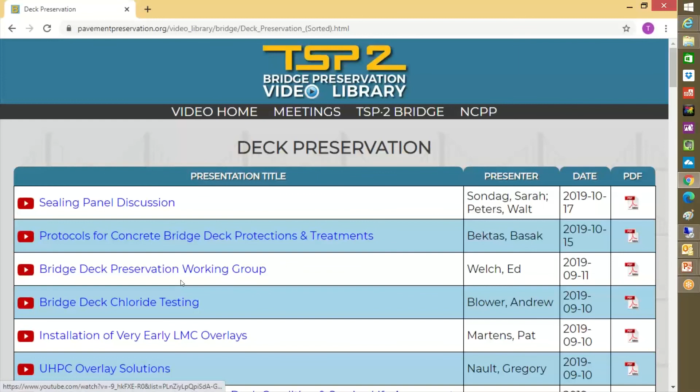You have Indiana gave a presentation on local agency outreach, working group, maintenance program in Hillsborough County. Not only do you have it kind of categorized here, but there's actually the recorded YouTube video of the presentation with the presenter. And you have a PDF of the PowerPoint presentation as well. I get feedback from a lot of different local agencies and state agencies as well that say that going through these different categories is a tremendous amount of information that's available. It's all completely free. So again, looking at that tsp2.org is definitely something that you would want to look into.

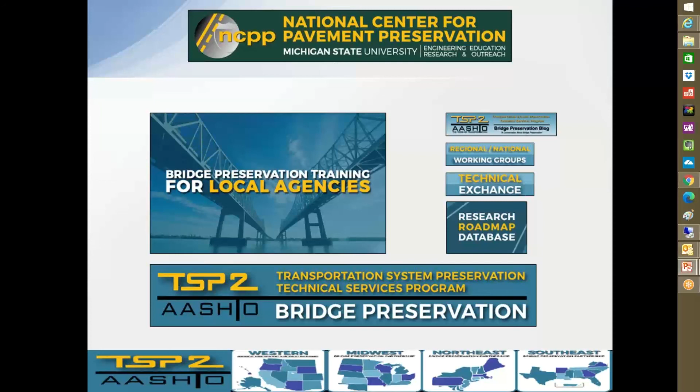A couple more screenshots of kind of going through the TSP2 website and the local agency information that we have there. I see that I have come pretty short on time. So I think with that, here's my contact information. Feel free to email me with any questions that you might have. Again, I'm going to keep pushing that website, tsp2.org. All the content on there is free. It's an amazing resource, and it points you to a lot of the different resources that you have available to you to learn more about bridge preservation.

I guess with that, I would like to open it up. Are there any questions from the group or things that you'd like to expand upon? Travis, this is Zach again from the city. I like how you talked a little bit about the car analogy. I don't know in your experience, and maybe Greg, if you have experience with it, but do you find this analogy works for any level that you're trying to talk to, state, local, does it really matter? Or are there ways to kind of craft it better for a local like we have?

I think it's a great analogy and I want to try to use it. I haven't tested it on everyone yet. However, I'm pushing it hard. So in Oregon, we're redoing our bridge condition report. And it's an amazing report, very detailed information, but it's really written towards folks like myself that work in the bridge community. And we recognize that we really need a better way of communicating our inventory and the work that needs to happen to that inventory to the public and even the legislature. And we're going to use the car analogy to push it forward.

I think it expands even past just the needs for preservation, but it also helps to kind of communicate that, hey, look, we have a whole fleet of 1975 Celicas. They are technically a car, like our bridges are technically bridges. As you continue that older fleet of vehicles, you get posed with lots of challenges, right? You got to be willing to accept that they may not be as reliable as a new car, just like our bridges may not quite be as reliable as the new bridges. I think it even goes into safety features, right?